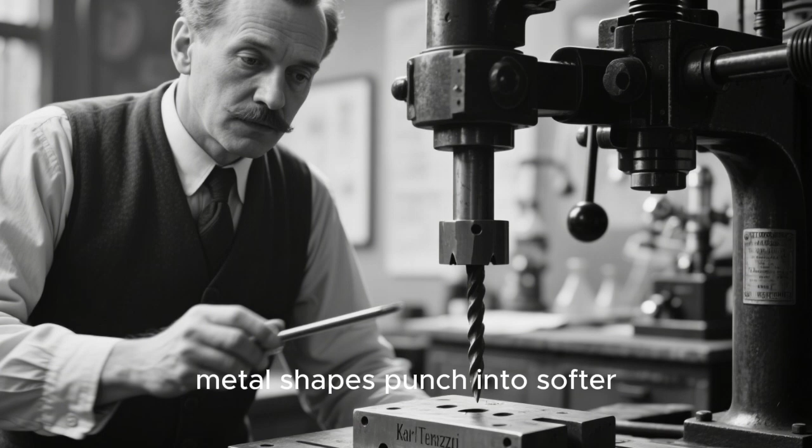A scientist named Ludwig Prandtl was studying how hard metal shapes punch into softer materials like clay. But one brilliant mind saw a parallel to a much bigger problem. Karl Terzaghi, now known as the father of soil mechanics, realized that a foundation pressing into the earth was just a larger-scale version of Prandtl's punch. He took that seed of an idea and grew it into the first reliable theory to answer the fundamental question: how much load can this ground actually hold?

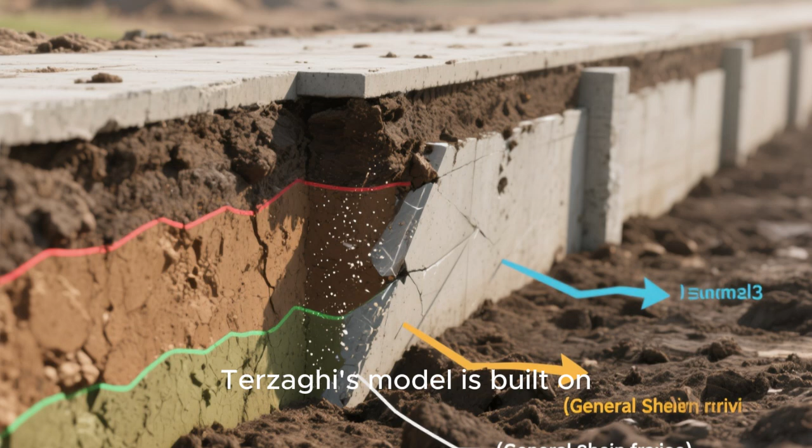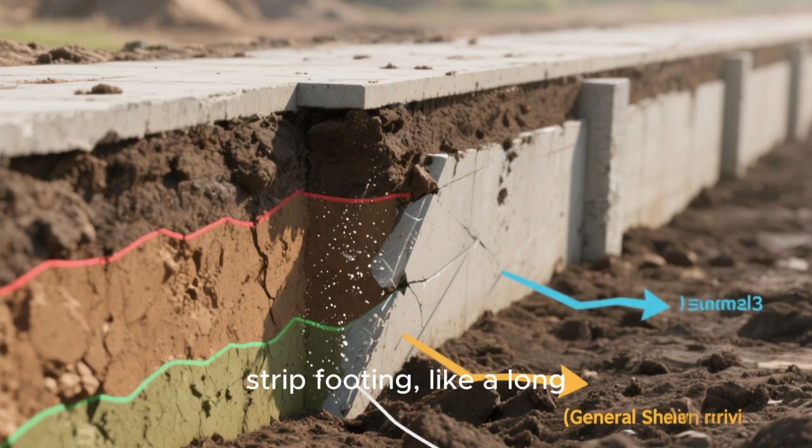But to build a universal theory, he first had to make some critical simplifications about how the real world behaves. Terzaghi's model is built on three main assumptions for what we call a shallow foundation. First, he assumed the foundation is shallow, meaning its depth is less than or equal to its width. Second, he modeled it as a continuous strip footing, like a long, unbroken concrete wall under a building. This simplifies the 3D problem into a 2D slice we can analyze.

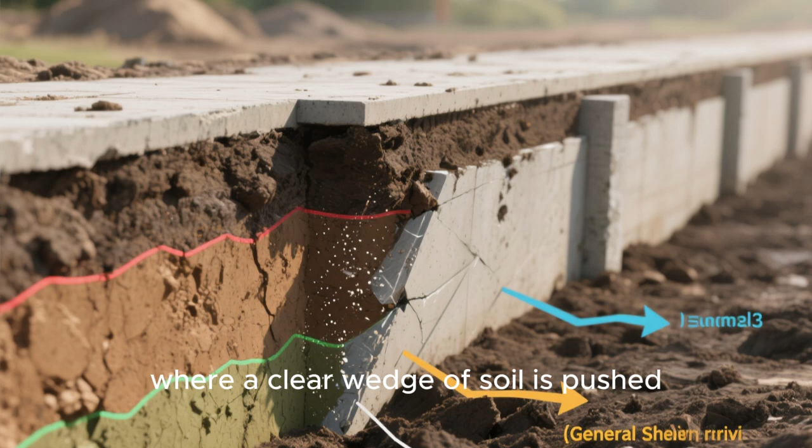Third, and most crucially, he assumed the soil would fail in a general shear failure. This isn't a gentle settlement. It's a catastrophic, well-defined rupture, where a clear wedge of soil is pushed downward and sideways. But to predict when that failure happens, he had to account for every ounce of strength the soil could muster to fight back. And that fight happens in three distinct zones: the soil's battle plan, the three failure zones under

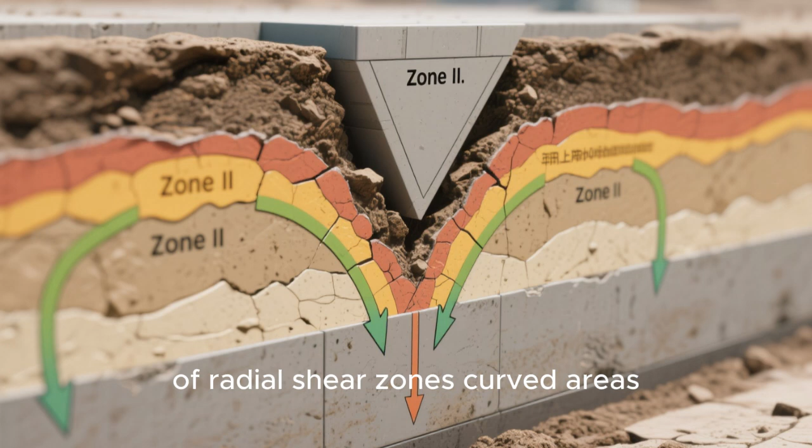a failing footing. The soil doesn't give up uniformly. Terzaghi's model divides it into three distinct battle zones. Right under the footing is Zone 1, a triangular wedge that moves down as one rigid block. Below that, Zone 2 consists of radial shear zones, curved areas where the soil is shearing and flowing. And out to the sides is Zone 3, where the soil gets pushed upwards in a state of passive resistance.

Think of it like this: Zone 1 is a giant foot stomping down, and Zone 3 is the surrounding soil bracing its shoulders to stop it. The key to the entire calculation lies in quantifying the heroic resistance generated in this passive zone. How do we calculate that passive resistance? The best analogy is a retaining wall.

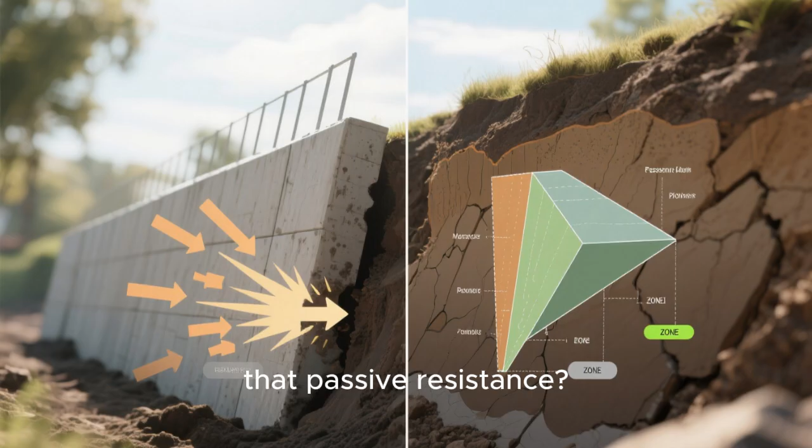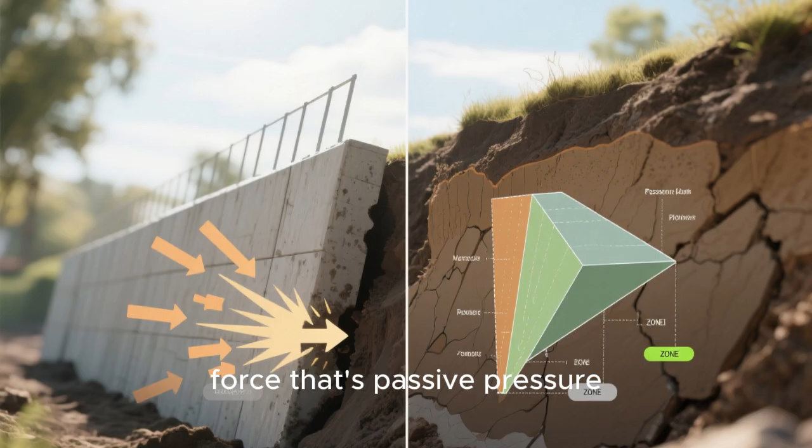In soil mechanics, if a wall moves away from the soil, the pressure drops, that's active pressure. But if you push the wall into the soil, the soil pushes back with immense force, that's passive pressure. Our failing soil wedge in Zone 1 acts exactly like a wall being shoved into the passive Zone 3. So, we can use established physics for passive earth pressure. But that's only one of three defensive forces.

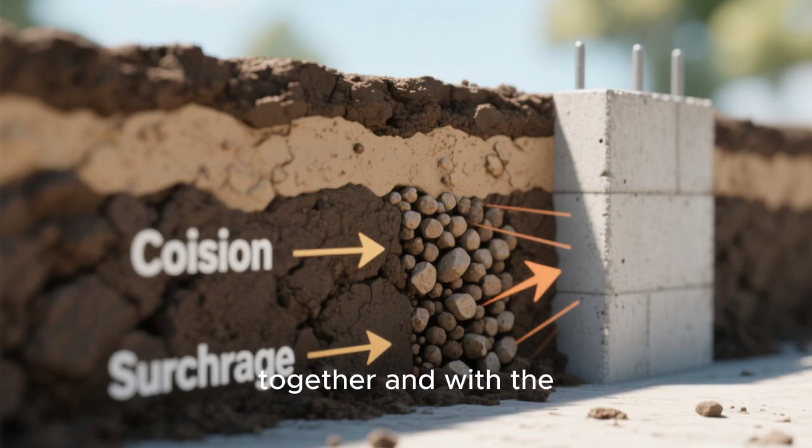The soil also fights back with its cohesion, its innate stickiness that holds particles together, and with the surcharge effect, which is the weight of the soil column already sitting to the sides of the footing. Now, with our three defenders identified: passive pressure, cohesion, and surcharge, we're ready for the ultimate balance of power. It all comes down to a vertical force equilibrium.

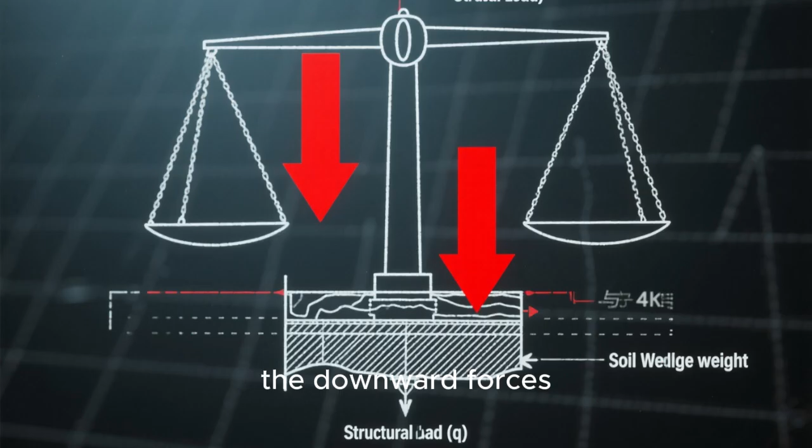On one side of the scale, the downward forces, the structural load Q, and the weight of the soil wedge itself. On the other side, the upward resisting forces. Our three heroes from the passive zone. By applying geometry and trigonometry to that wedge, we can express each force in terms of the footing width, B, soil weight, cohesion, c, surcharge, q, and the soil's internal friction angle.

When we group all the terms related to cohesion together, they form a factor we call Nc. Group the surcharge terms, that's Nq, and group the terms related to the soil's unit weight and the footing width. That's Nγ. These are Terzaghi's legendary bearing capacity factors, Nc, Nq, and Nγ. They are not arbitrary constants. Each is a direct mathematical function of the soil's friction angle.

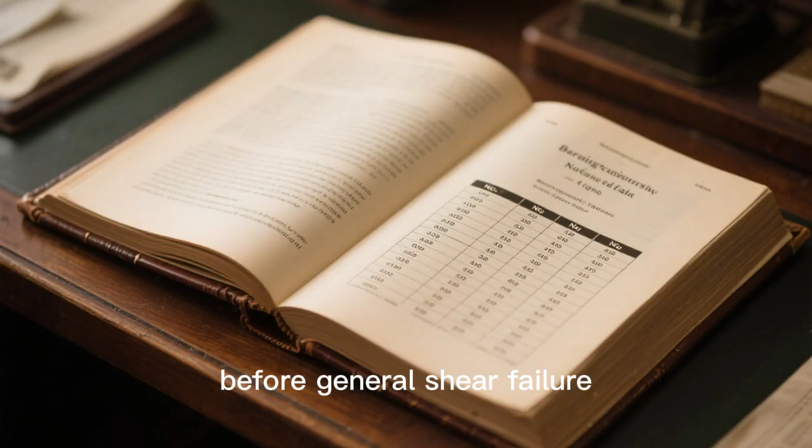Their values, often looked up in a table, condense an immense amount of geometric and physical complexity into three simple numbers. Plug them into the equation, and you have your answer: the ultimate pressure the soil can withstand before general shear failure. This was the groundbreaking formula that gave engineers their first true predictive power. But the real world, of course, is never as perfect as a theory's assumptions. Terzaghi gave us the cornerstone, but later scientists built the rest of the house.

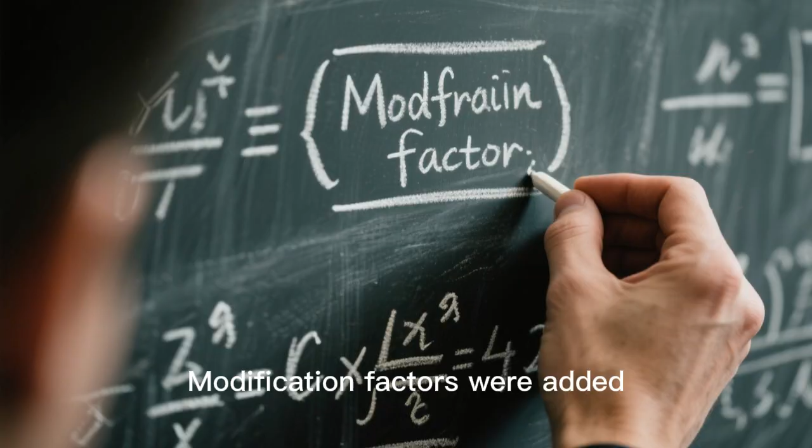His original equation was for a long strip. What about square or circular footings? Researchers like Meyerhof introduced shape factors. What if the soil fails in a softer, local shear mode? Modification factors were added. And what about the water table? This is critical. Water changes the effective stress in the soil, and its presence must be accounted for in the Nγ term, which is a topic for a deep dive all on its own.

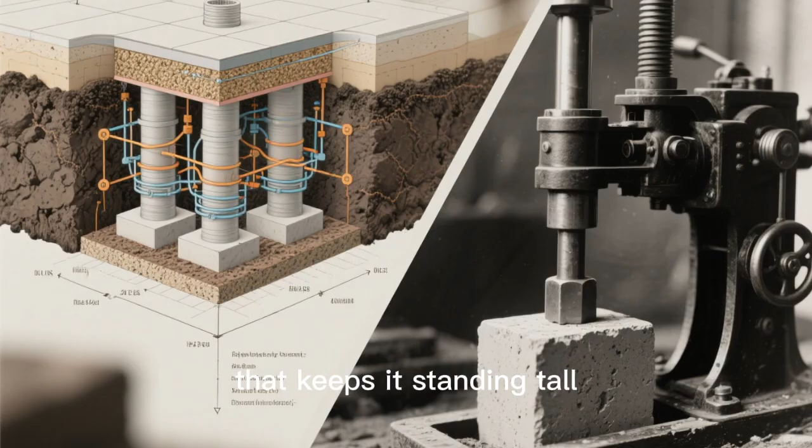The Terzaghi equation is your starting point, the fundamental law. Every other formula in your codebook is a refinement of this brilliant original idea. So, the next time you walk past a massive structure, remember the hidden calculation happening below. It's a balance of forces, derived from a century-old punch test, that keeps it standing tall. The true foundation of engineering isn't concrete. It's the ability to model chaos with elegant math.